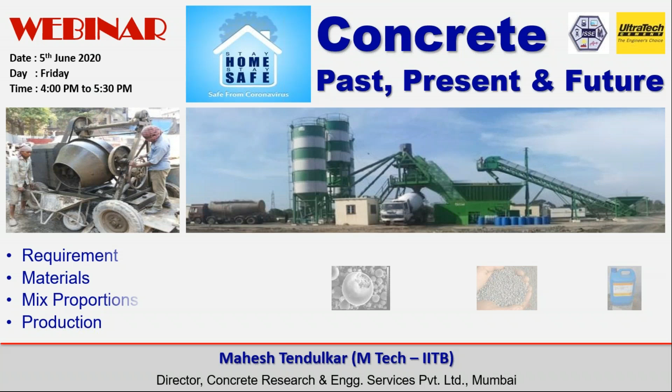There are other factors we should consider - what was the requirement in the past, what was the material we used, mix proportion, mix design, as Jain sir was telling, 1:1.5:3, 1:2:4, whatever we call it. How we were producing the concrete, what was the quality control, and most important, the workmanship, supervision, and how the concrete was performing in old days.

If you rightly see, we have improved a lot in materials - cement, aggregate. But what we are lagging behind is mainly supervision, workmanship, and quality control. So that is the most important part, and that's the reason today I'm going to cover a few points.

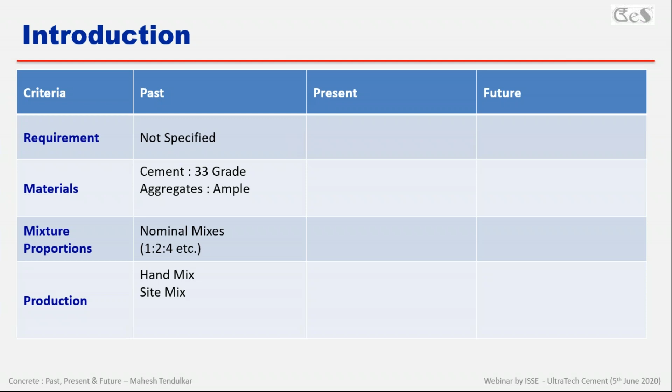The moment we changed, we started talking about grades M20, M25, M30. Even sometimes now we are easily producing M60 and M70 grade comfortably. M80 onward is still a nightmare for the site engineer to produce consistent M80 grade concrete for the structure. We'll come to this point later.

The material we are using now, 33 grade is obsolete, we now have 53 grade cement, OPC or PPC, and aggregate is becoming a big problem. There's a scarcity of aggregate, and we are now using admixtures as the demand for water cement ratio is decreasing. We are doing mix design now, talking about grades which will give specific strength at 28 days. Apart from site mix and hand mix, we have started using ready mix concrete.

Now, what is coming in the future? Slowly and steadily, especially in infrastructure projects, you can notice there is a service life requirement, a 100-year service life of the structure. So durability is now the governing factor, and concrete strength and grade is becoming slowly a secondary requirement. Durable structures are coming into the picture.

Use of supplementary cementitious material along with microfiber material is a must when we go for higher grades of concrete, say 40, 50 and above. Manufactured aggregates - nobody ever thought of producing sand, because we also faced a lot of scarcity in our metro projects in 2009, and then slowly we shifted from natural sand to 100% crushed sand.

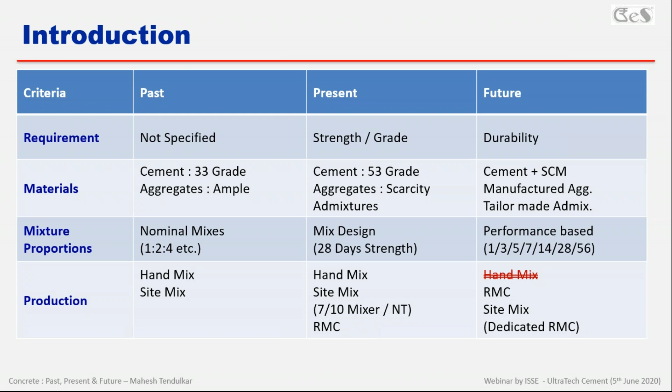Production, as Jain sir rightly pointed out, I have just scratched out that hand mix. Though it is not officially scratched, it should be, and I will explain some of the cases. Apart from site mix, now people are going for dedicated tailor-made RMC plants, very small plants which can produce 100 cubic meter or 50 cubic meter in a day, and they can produce their own concrete. So this is now coming in the future.

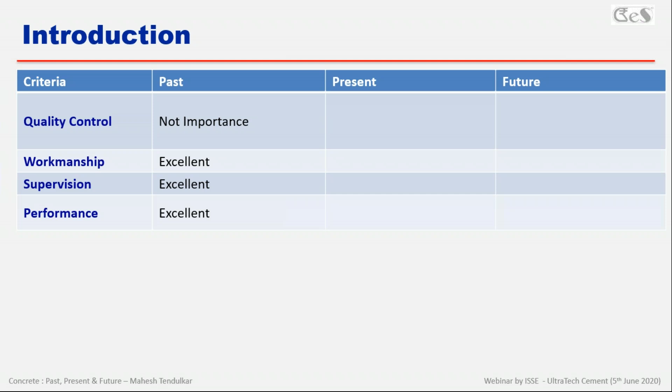Nowadays, we are talking about cube testing, and whenever there is a cube failure, there is always a post-mortem, which we call NDT. I will share my experience from our laboratory. Nowadays NDT is very common for new structures, but non-destructive testing is actually a tool for assessment of structure strength, especially for old structures. When doing bridge inspection, we have tested more than 150 bridges for NDT assessment - it is a tool for condition assessment, meaning structural audit.

Unfortunately, we are using it for fresh concrete, 28 days concrete. You won't believe it, sometimes users ask to test the NDT at 40 days. I don't know what is the purpose and meaning of that. This is a problem of workmanship and supervision - nobody is really doing the job by their heart on site, so performance concrete is not up to the mark.

And when we go into the future, already we have started in developing cities like Mumbai.

Apart from cube test, there will be durability tests specified. And not only that, some NDT of 5% or 10% of the structure will be part of the quality control measures. Another thing is the assessment of cast concrete strength by maturity index, which is a very interesting and advanced science coming into the picture, and I'm sure it will grow very rapidly within the next decade.

Nowadays, unfortunately, nobody is going into the depth of concrete mix design and the requirement of concrete. So we must understand concrete, and that's why I always call this KYC - that means a different kind of KYC. We must know our concrete in two stages: when it is in plastic stage and when concrete is in hardened stage.

Now let's see why concrete - because we know concrete is the cheapest material available for construction. You can produce concrete from locally available material and produce it with some quality control measure. That is the reason we must use this concrete, and we are using it on a large scale.

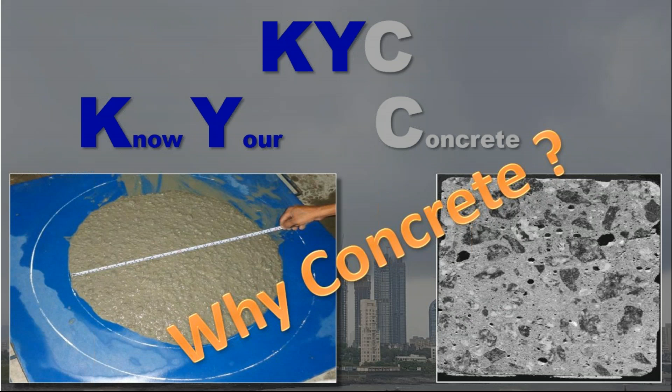In our country, this is a small analysis I have done about the estimation of concrete. Just based on cement plant installed capacity, it is around 500 million tons, and it is growing about 5 to 8% every year. Out of that, almost 64% is going into the housing sector, and infrastructure commercial is almost around 30%.

If you see, out of 500 million tons, even if you consider 75% capacity utilization of the plants, we are producing 375 million tons of cement in a year in our country. If we assume 60% is going into concrete, so 225 million tons of cement is used to produce concrete, with a nominal cement content of say 8 bags per cubic meter. We are producing almost 1.5 million cubic meters of concrete per day, which is around 675 crores per day.

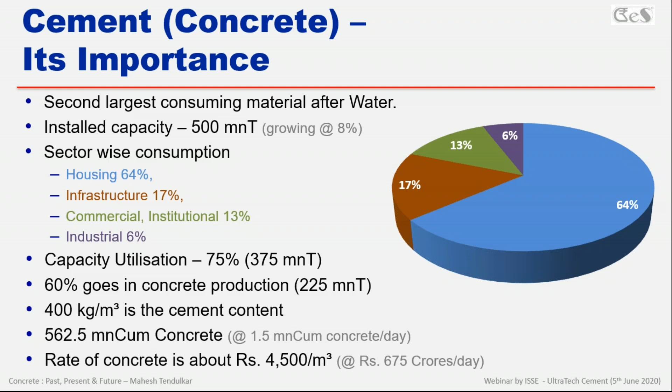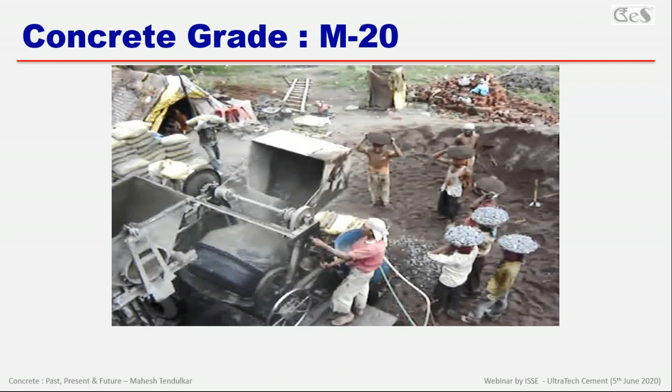So we are handling such a big economy of our country, and what we are doing at site - as Jain sir has rightly said - I'm not saying all sites, but the majority of sites, this is the condition. We are producing concrete by old tradition: gangwalas, gamelas - they don't know anything about water cement ratio or proportioning of mix, and they are casting the slab.

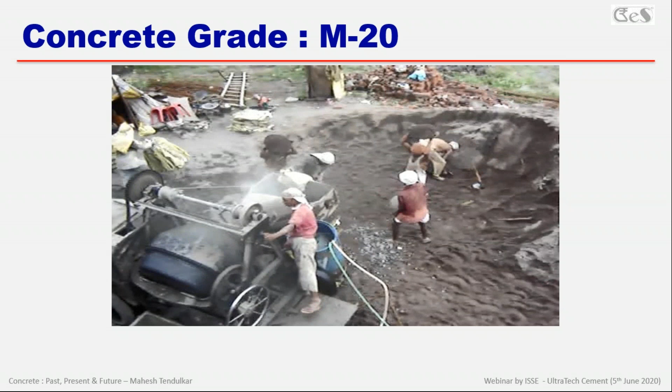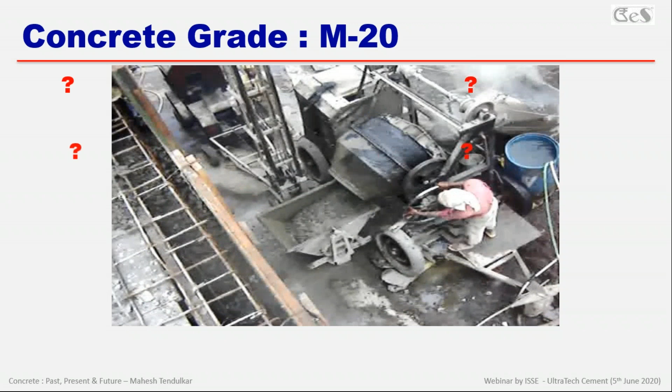This is my own experience in 2004, in one of the district areas of Maharashtra. I was standing on one of the slabs, and this is the concrete which was produced. So as a curiosity, I thought let us take a cube of the concrete which was produced by this mixer operator, and let us assess what is the strength of this.

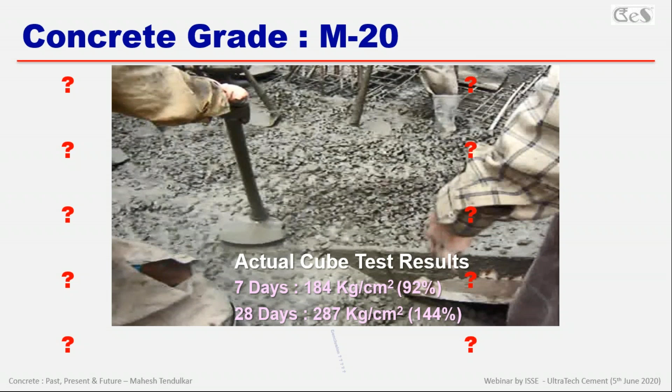What we observed - the actual cube test results of M25, M20 grade concrete was almost 280, meaning almost 130, 140% above the characteristic strength. So we get confused. What is the conclusion from this? Whether mix design is really important, or jo chal raha hai wo chalne do - whether we are fools who are insisting on mix design, or what they are doing is correct.

But that is the reason I was telling in the beginning - now the focus is changing, and strength is going to become secondary. Even though we achieve the strength, durability is going to be hampered in such structures because of non-control of water cement ratio. And this is most important.

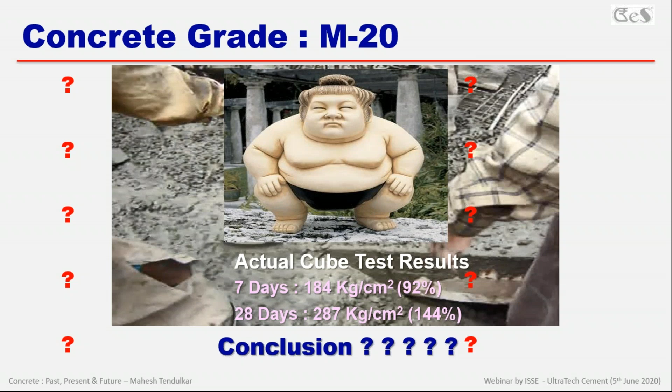You will find that all our cement companies in India have changed from wet process to dry process. They have very good quality control, and they are producing very good quality cement. But unfortunately, we are not using that cement rightly at the site - we add extra water, and we lose the benefit of good quality cement produced by our good scientists in our country.

So, I'm talking about the evolution of batching and mixing of concrete in our country. Earlier, 7x10 mixers. Then I remember around '96 or so, weigh batching was made compulsory by some government projects. So in between, weigh batchers were introduced, but it was really an eyewash.

Then we started the CP30 batching plant, compartment batching plant, and now we have the batching plant which can produce 3 cubic meters of concrete within 1 minute. So we are having such a high production capacity.

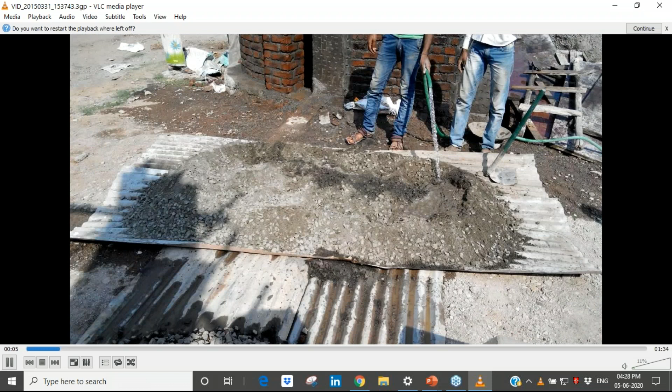We talk a lot of things in seminars, but whether that goes and gets implemented at site. So this is a typical situation.

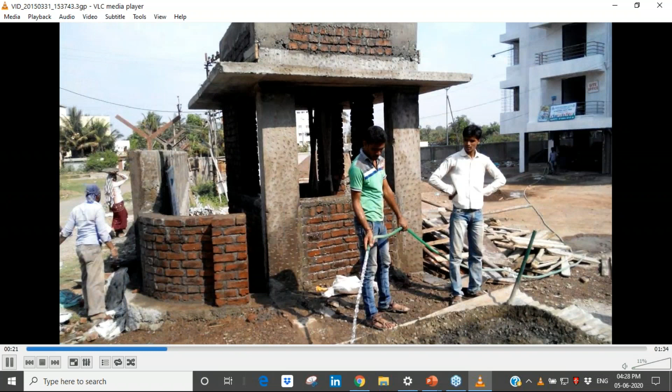We asked him to cast the column again in front of us, and this is the column which he was complaining about. He cast this maybe 12 hours prior, and after removing the shutter, he says this edge is breaking. Now I am sure if the condition of production is like this, it's actually much better concrete, because if they are producing concrete by such a method, the column is at least standing.

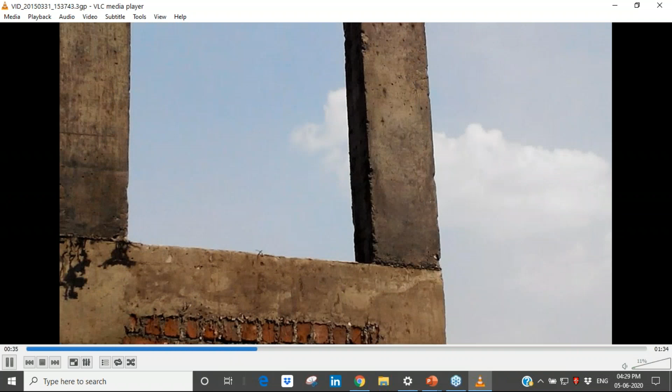They are not measuring the water cement ratio, and this is a situation happening in our country. This is a whole structure, G+7 building, standing on columns which are cast by such kinds of things. So this is a typical scenario of the overall condition in our country.

So we say yes, concrete, we have RMC, so we have solved the problem. Yes, RMC can solve the problem provided we implement the whole system of RMC. Truck mixer will come, it will pump the concrete, compact it properly, shuttering is good, our structure is good. But my observation is, what about the casting of columns?

Nowadays, in many cities, even in cities like Mumbai, the transit mixer will come to site and they will not use a pump for transporting concrete. They will use some Indian jugaad, and then they face a lot of problems. This is a real case study in one of the buildings in Mumbai.

There was a transfer girder cast at this location, maybe on the 7th floor, and there was a fear with the consultant that there is something wrong. So he wanted to take the core of that column. And after taking the core, it was surprising, the concrete had not achieved even about 60% of strength even after 3 months.

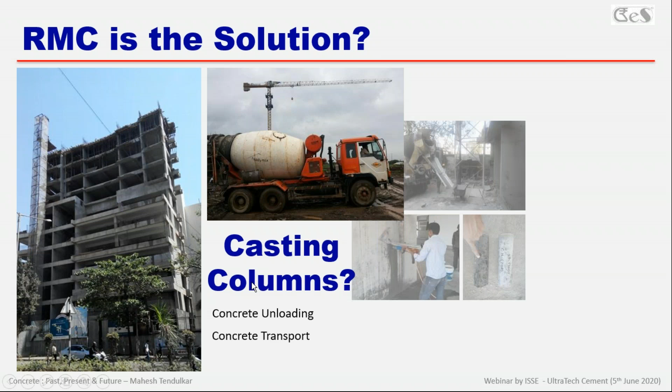So the transit mixer was waiting at site almost 3 hours. And what happened then, we have taken the core, and you can see congestion was so high and heavy that whenever concrete was poured from the side, the aggregate was not flowing to the surface. You can see the surface, there is absolutely no aggregate or very little aggregate in the core surface area, the cover zone.

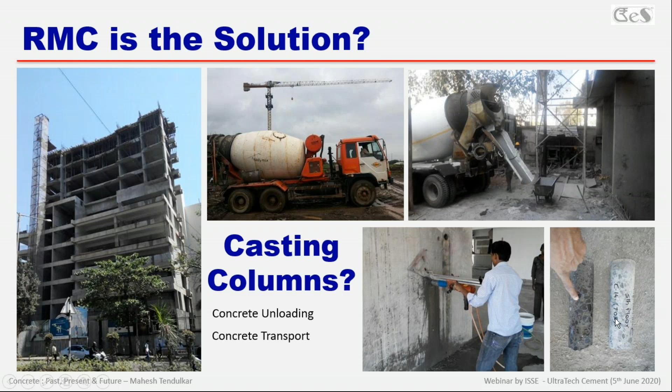Even when we cut this cover zone and tested this core, still we found it was not even matching 90% of the strength required. You can see some clips, I hope you must be viewing this clip.

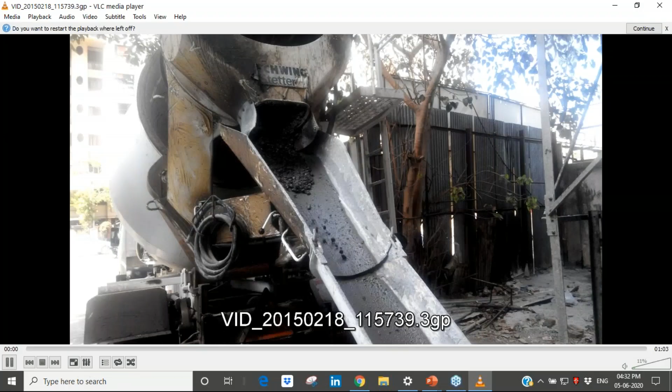This is typical, when we go for high grade concrete, a lot of precaution is needed for the admixture and crushed sand. You can see the concrete itself is segregating even while unloading from the transit mixer.

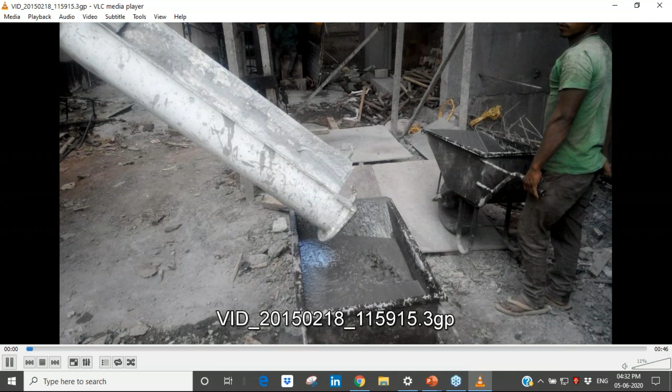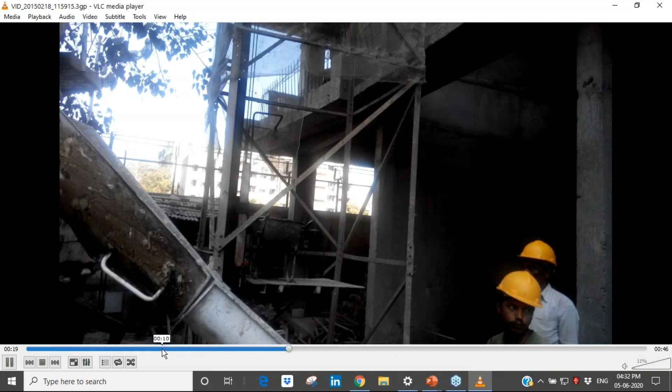Then this concrete will be taken to the further level by this winch. We perform this, we say this is a high-rise structure, a good structure, but actually this is a crude method, because a pump is not arranged, as pumping concrete requires some minimum cubic meters or there are extra charges, so we don't afford to pay that additional price for pumping, and this crude method is used for casting the columns.

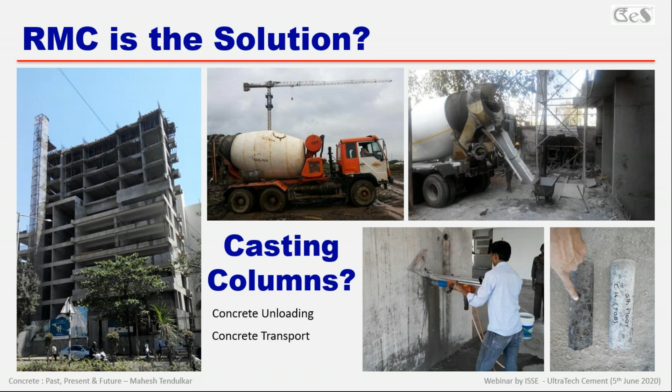Who is selecting the cement? It is supposed to be the engineer's choice. But when we go to the common man, they believe in advertising, they believe in branding. The builder will believe in it, the owner will take the decision, in a project the purchase officer will take the decision. And everywhere, the poor civil engineer has no option but to use the cement which is selected by the purchase department, the owner, or the common man.

There are very misleading slogans on cement bags. I was told that now it will be banned in our country, as they are having some rules. So this is how the selection of cement happens.

What are the selection criteria? Our selection criteria is the cost per bag. Now the cement prices are going and reaching 350, 360 rupees per bag. So even if we get 5 or 10 rupees cheaper, we shift the brand, we shift the type of cement very frequently. So we judge the cost per bag, not per cubic meter.

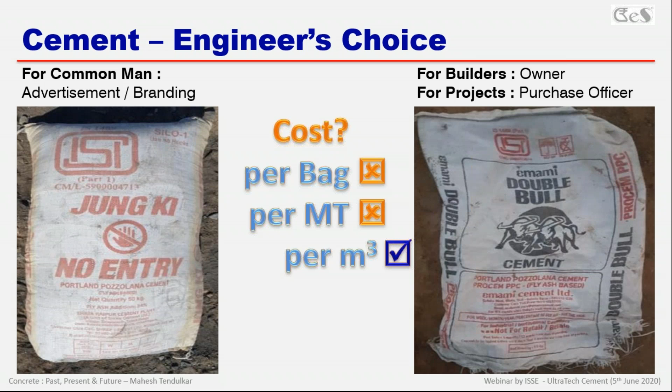We have implemented this at some sites in Mumbai where we were working as a consultant - working out the concrete mix design with a particular cement to see the benefit, whether that cost reduction of 5 rupees is really worth it or not. Otherwise, we have to put extra cement, extra dose of admixture, and ultimately our concrete mix is not economical. So whenever we are comparing cement prices per bag or ton, always compare with the per cubic meter cost of concrete by doing trial mixes.

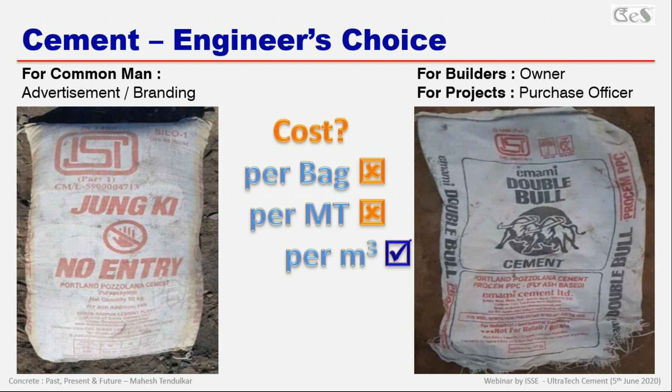Another part I want to highlight: when I was visiting one site in Aurangabad, Maharashtra, SRPC was insisted upon because it was a sewage treatment plant, but there were very high chlorides present. So it was really an injudicious choice. Whenever sulfate and chlorides are both critical, SRC is not the right option. SRC can be used only if chlorides are not present or are minimal.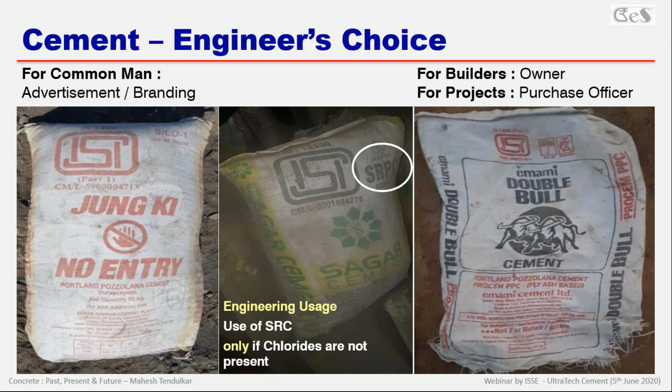So this is the technical part as far as cement is concerned. Apart from cement, as I said, the present cement is not OPC cement. We are now blending OPC with fly ash, blending GGBS, adding microsilica, adding ultrafine GGBS, Alcofine brand. So we are going to higher and higher grade by packing density, improving the packing density, initiating secondary hydration. But today I'm not going to touch that part in greater detail.

Whenever you are going for high grade, we have to use blended cement or supplementary cementitious material at site. But be cautious - if we are using fly ash or GGBS at site, we should have a proper batching and mixing plan. Otherwise we can't just use a 7/10 mixer and add GGBS in it. No, it is just impossible. Then we are really playing with the life of the structure.

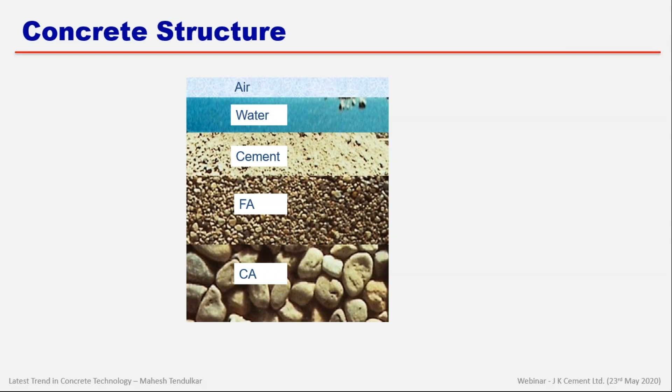Then we come to the next part, which is the concrete structure. If we talk about concrete, we are always cautious about selection of cement because cement is the costliest material. But if you see the concrete structure, the majority part, around 65 to 70%, is aggregate. But cost-wise, that is the minimal part. So we don't look at the aggregate part carefully.

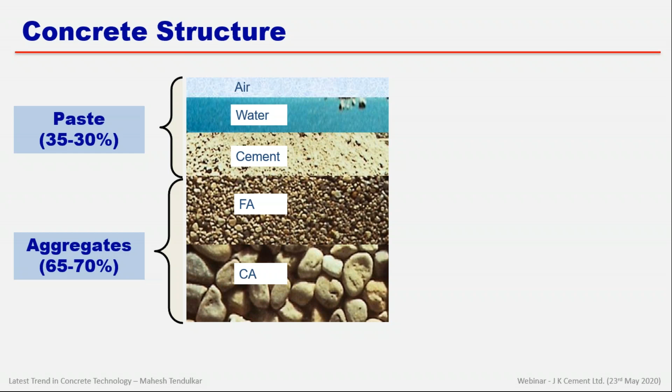But when we go higher grade, aggregate becomes more critical and the paste will be very strong. Concrete will not fail in bond, but aggregate will fail. So whenever we go for 50 and above concrete, we should be very cautious about various types of coarse aggregate and fine aggregate. Nowadays we have no option but to use coarse aggregate - 10mm, 20mm single size aggregate, VSI. I will touch on that point in detail later.

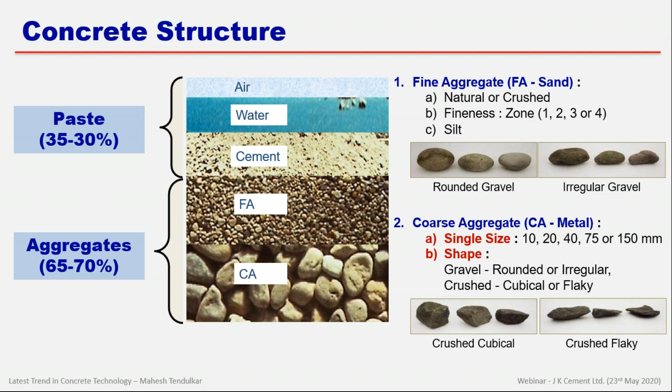Then crushed sand also - we have fine aggregate also. Now it is manufactured crushed sand. So we have good plants available, even at district level I've seen good manufacturing plants of aggregate.

And this is part of our planning, I will say. This was one of the infrastructure projects we were visiting - a road project where at least 5 to 6 lakh cubic meters of concrete is going to be produced. During our first visit, we observed that at site there was a fleet of transit mixers and a fleet of placer booms ready, but the crusher was not ready.

For such a huge concrete quantity, we must have an in-house crusher. According to me, for any road project, the crusher is the heart of that particular project. If the crusher is delayed, the whole project will get delayed. If the crusher is not properly designed, our concrete will have a lot of problems during execution.

This is aggregate right from the crusher. As a civil engineer, we should get involved in planning and designing of the crusher also, because that will have an effect. As we discussed about the gang-wala concrete for bungalow slabs, if you go to any district level, they use only 20 mm aggregate and sand. Surprisingly, some engineers will also tell you that 20 mm aggregate will give the strength. This is one of the biggest myths, that 20 mm aggregate gives the strength.

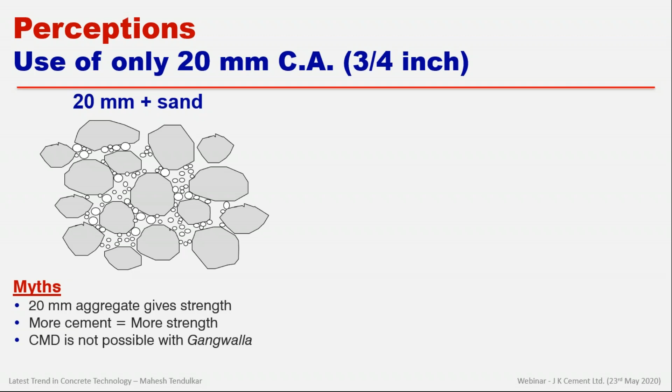I have seen a lot of mix designs where they design for 80 mm, 100 mm slump, and then hand it over to the gang-wala, and then there is a whole problem - strength and durability will create issues. Here, the most important point is we must use 10 mm coarse aggregate. This will ensure optimum packing, reduce segregation, improve cohesiveness, and give better concrete.

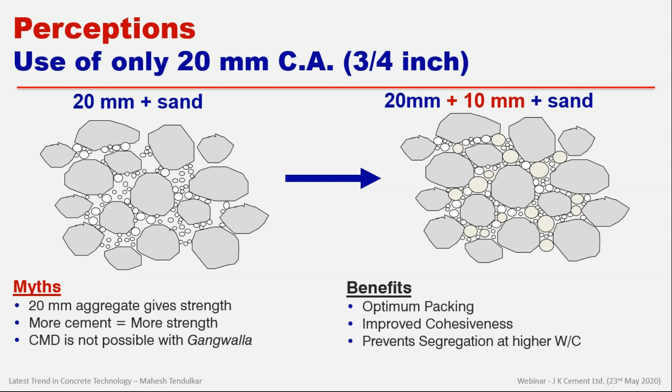If you go to any crusher, there will be ample 10 mm aggregates available. It is not that the crusher produces only 20 mm and sand - no, 10 mm is also available. Sometimes they crush this 10 mm to produce manufactured sand. So that is the result. My sincere request to all site engineers is to visit the crusher at least once, and then decide which aggregate we have to use in concrete.

So this is the most important tip - you must visit the crusher, and see what we should observe there. On the right hand corner, this is a typical old-age crusher which I have seen till the 90s or maybe 2000. Even now there might be a few such crushers available, but I don't think such kind of crushers are common now.

They were having rotary screens - it was a jaw crusher which was crushing the aggregate, and this rotary screen was screening the aggregate. So there was always a problem that 10 mm was mixed with grit, and 20 mm was oversized. This was a typical problem when using aggregates from this type of crusher.

I still remember, as per code we have 10 mm, 20 mm, 40 mm aggregate sizes. But when Mr. Remedios was teaching in his book, he was classifying 15 and 30 mm also, because at that time we were not getting single size aggregate, before this VSI aggregate technology.

So what should we see at the crusher? First stage crusher is the jaw crusher, second stage crusher is the cone, and third stage crusher is the VSI crusher - actually vertical shaft impactor, which is a shaping tool. It gives good shape, reduces the flakiness and elongation index of aggregate, and we get single size aggregate.

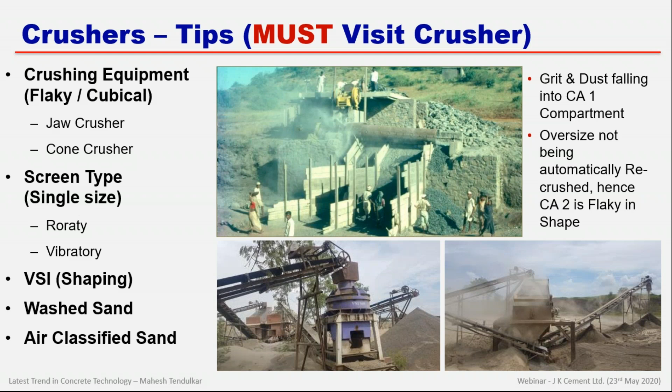This is removed by washing the sand using different mechanics. Not only that, recently air classified sand has also become available, and these are not even imported sand; these are our indigenous sand plants. What they are doing is, after the VSI process, they are extracting the fines from the crushed sand. This is a very good technique.

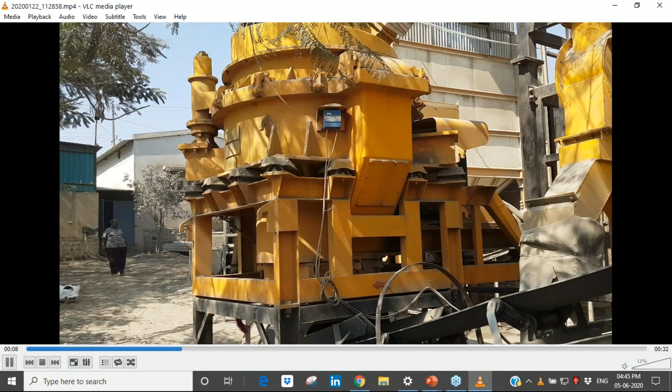I can just show you one system. This is a typical system of an air classified crusher. The problem with washing is sludge, which is a big problem. In a typical air classified system, it sucks the fines. I think there is some problem with the video streaming, but I'll show you in the next video.

Whenever this crushed sand is on the bed, the system takes the finer particles from it. These are the fine particles which are unwanted for our sand. So the 75 micron fines get reduced and we get a good quality of crushed sand. When we use this quality of crushed sand, we can comfortably produce M80, M100 grade concrete with a proper mix design.

Here you can see this is a normal crushed sand, VSI crushed sand, and this so-called crushed sand is actually grit. It is crusher dust. It is not processed. It is simply a waste product from any crusher, especially a rotary crusher.

These are a small comparison of how this affects quality. I compared manufactured sand from VSI versus normal stone dust. The main difference is in 75 micron passing. Here it can be controlled to a 5 to 15 or 18-20% range. Here there is no control and no consistency, and water demand will vary during concrete production, making it very difficult to control concrete with such crushed sand.

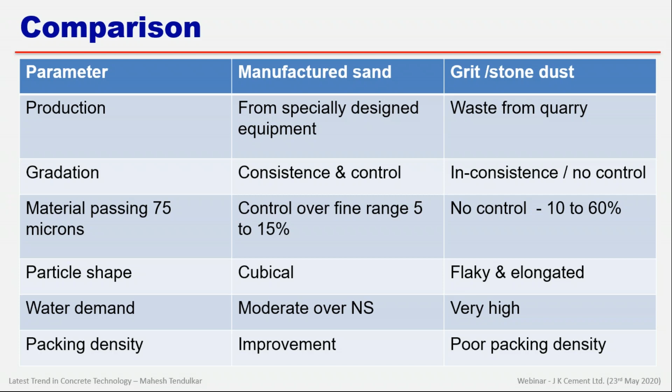So this is the main reason we should ensure that whenever producing concrete with manufactured sand, it must be VSI manufactured sand. If it is air classified, it is well and good.

Now, the next point I want to highlight is the laboratory. In this laboratory, we really don't want to spend a single rupee. You can see we are developing structures like G+22 buildings, M30 concrete. But what is the testing material laboratory at site? Where is the testing lab? So this is the testing lab - a very pathetic situation of such labs.

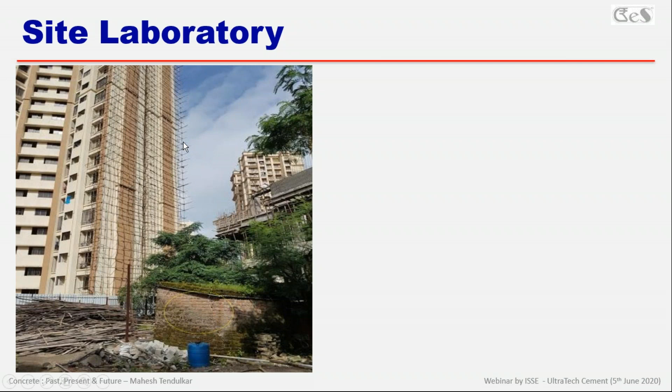This is the most important heart of our quality control, and there we want to minimize the cost. If the normal range of a CTM machine is about 1.6 lakh to 3.5 lakh rupees, we ask, is there something cheaper available? Then somebody will say, okay, 60,000, 80,000, okay very good, 50,000 - then go to manual mode. Just imagine, we are producing crores of rupees worth of concrete, and we are saving a few lakhs on the machine that tests the whole quality control of our concrete.

This was a particular topic of my MTech thesis. I compared it with the metro project analysis of Mumbai Metro, and with the latest projects going on, which have specified very good methods of quality control under QAP.

The whole lab equipment was costing 23 lakh rupees, and for that particular project, about 4 lakh cubic meters of concrete was going to be consumed. The cost of lab equipment was 6 rupees per cubic meter, and the average concrete rate of all grades was around 6,350. So lab equipment cost works out to 0.01% of concrete cost. So there is no logic to spend so much time negotiating to select the cheapest material for a laboratory.

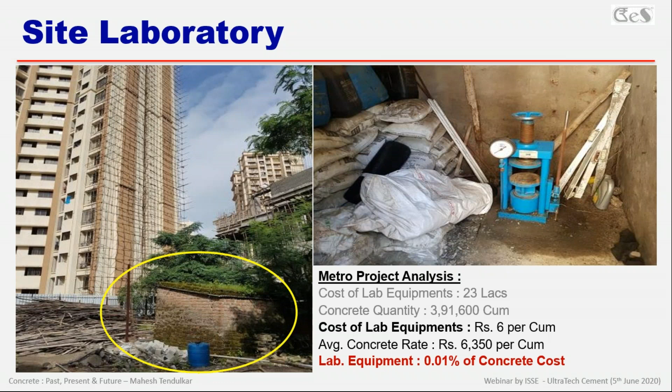One should have a bare minimum laboratory at site. For a normal building, I'm talking about the district level or extended suburbs like Kalyan, Dombivli, where we don't get RMC but we are getting crushed sand - the CTM machine, which is the costliest material, let's remove that. We can test in a third party lab, or some cement companies are giving cube testing service which we can utilize. But at least we should have bare minimum testing equipment at site.

So at least we should have sieve analysis. Even if we don't have a full set of sieves, at least 20mm, 4.75mm, 600 micron, and 150 micron sieves are required, along with a weigh balance.

So we can find the problem with our crushed sand or even the aggregate size. For specific gravity, we require very nominal equipment called pycnometer, very negligible cost. For moisture absorption, even if not oven, a hot plate is sufficient.

But do something and get the figures at site by testing, and make a habit of testing aggregate at least once in a week. So one should have a normal technician at site and one quality control engineer at site, and they should do some aggregate testing once a week. After testing regularly, we can just by our judgment accept 10mm and 20mm aggregate based on visual inspection.

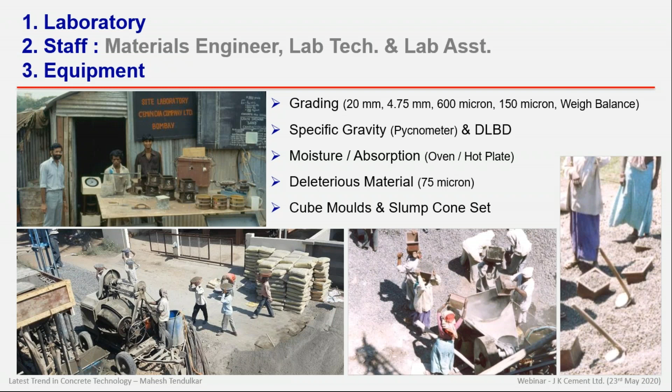Now, chemical admixtures - I don't want to go into much detail on chemical admixtures, but when we go for higher grade concrete, we are creating a lot of problems, because admixture use is becoming very critical, especially with crushed sand. So before going to that, what is the main effect of admixture?

There are two main effects. We want to increase the initial workability - that's what a plasticizer or super plasticizer does - and we want to delay the setting time. So there are two common effects which we use. Initial slump is increased so we can transport the concrete, place the concrete, and compact the concrete. And if it's a big pour, we don't want a cold joint, so we want to delay the setting time - that is called retardation.

But nowadays, admixture companies have done very good studies and come up with admixtures having both effects - they call it a retarding super plasticizer. Depending on the requirement, they have the retarder dosage built into one pack system. Ideally we can add two separate systems, but now we can have one pack system which has retarding super plasticizer.

If we are at the RMC plant, I have seen many reputed plants use a two-pack system, where they use retarder separately and admixture plasticizer separately. This can be used, but for normal site mix concrete, it's better to go only with the retarding super plasticizer. Then we must know what is the base of admixture available.

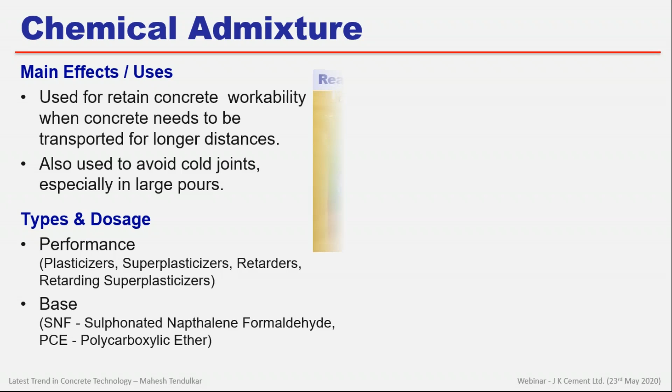There are two kinds of base mainly in our country. One is SNF base, which is sulfonated naphthalene formaldehyde, and one is PCE base, that is polycarboxylic ether. The first one is generally used for lower grade concrete, commonly used with natural sand. So natural sand, M40, M50 grade concrete was possible with SNF, but nowadays we have this latest PC admixture. There are parameters: low PC, mid PC, high PC. I don't know how they classify it, but performance-wise we have to judge it for the admixture dose. Now I am talking about some district area.

Always add admixture in liquid form, especially in the 7/10 mixer. Don't go for any powder-based admixture, because I have seen this pouch I collected from one of the sites. Slab concreting was going on. That pouch was costing 50 rupees and having 50 grams of powder. And then I collected some, and after washing, I studied that material, and there were some instructions.

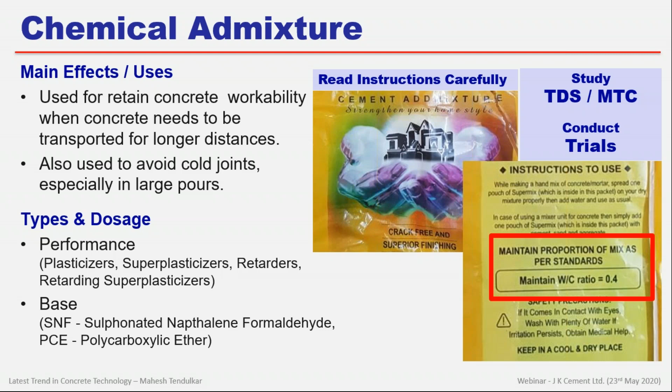So ideally, if you are doing any admixture, there is no harm, but first study the technical data sheet, TDS, and manufacturer test certificate. Conduct a control trial with the admixture trial, and find what difference you are getting. What is the effect, how slump is increasing, how setting is delayed, what benefits you are getting, is water reduction there, and then only use this chemical admixture.

So this is very common. This chemical admixture is not magic. It only gives a negative charge on the cement particles, so they repel each other, and this entrapped water is freed, so slump is increased.

I am going to share this presentation slide at the end. I will ask the organizer to share these slides, because arbitrarily I have given one example of how it works. Mix 400 cement, 200 water, simply, so we can understand 0.5 water cement ratio. So if there is no admixture, we get X slump and Y strength. This is a control mix.

The moment we add, say, 1% dose of admixture, because of the admixture this water is free. So what will happen? Slump will increase. So there is an increase in workability. But our target is not to increase the workability. We are happy with the same workability.

So what we can do is reduce water and add the admixture. We have added 170 liters water and 1% admixture. When we reduce the water, what has happened to water cement ratio? It is reduced. So slump is again back to normal, but strength is increased. So there is an increase in strength.

But why admixture is becoming very popular is the third point. What we can do, even if we don't want to increase the strength, is reduce the water, reduce the cement, and maintain the water cement ratio the same. So we get a reduction in cement content. That is the reason I will say for M20, M25 and above mixes, we must use the admixture, then only we can produce good cohesive concrete at any site. So this is a simple dispersion mechanism of admixture.

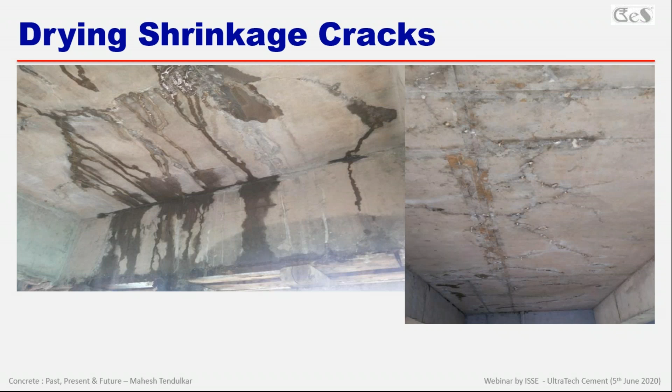So the best way of protecting concrete is by use of plastic sheet. This is a view from one of our road project sites. The contractor was very much reluctant in the beginning to put plastic sheet, but this is not an extra cost because we have to put some plastic sheet between DLC and PQC anyway. The same plastic sheet has been applied on top. So what is the benefit of this?

Imagine there is a concrete surface, we put plastic sheet, and water from concrete starts hydration. This is an exothermic reaction, so water will be heated and will try to come out from the concrete surface. But because of the plastic sheet, it will condense. All these water vapors will be condensed, and you can see droplets within a few hours or even half an hour beneath the plastic sheet.

So we are improving the humidity level beyond 90% between the concrete surface and the plastic sheet. But the precaution is the plastic sheet should be absolutely watertight, so it should be strictly placed on the concrete surface, not above it. Otherwise it will be a disaster and there will be a wind tunnel effect, causing more evaporation of water.

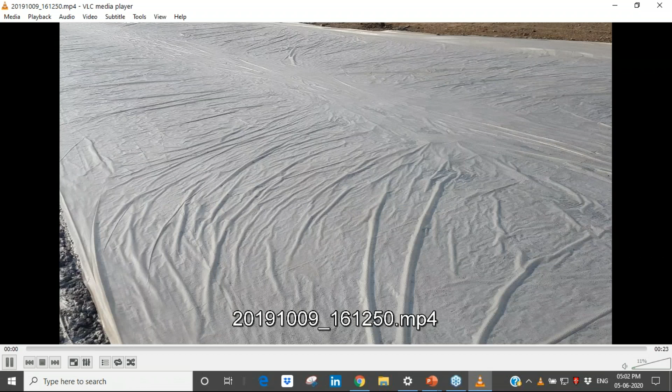Sometimes there is confusion. Now we are doing a lot of temperature-controlled concrete, so thermocol is also used. Since we have some time, I will explain the difference between thermocol and plastic sheet. The plastic sheet will condense the water, improve humidity, and avoid evaporation loss. But thermocol will do an additional thing - it will act as an insulator.

Suppose the core temperature of concrete increases to 70-80 degrees, and the surface temperature tries to match the ambient temperature of 40-45 degrees. Then there is a temperature gradient, which could cause thermal stresses and the concrete will crack internally. This happens mainly in mass concrete, and if you see, all our infrastructure projects are nothing but mass concrete. So that temperature has to be controlled.

Even in our metro project, our placing temperature was restricted. Proudly I can say it was the first time in a metro project of our country that 30 degrees was the placing temperature for all structures, including pile up to girder. So 30 degrees was specified, and we have done a lot of trials for that.

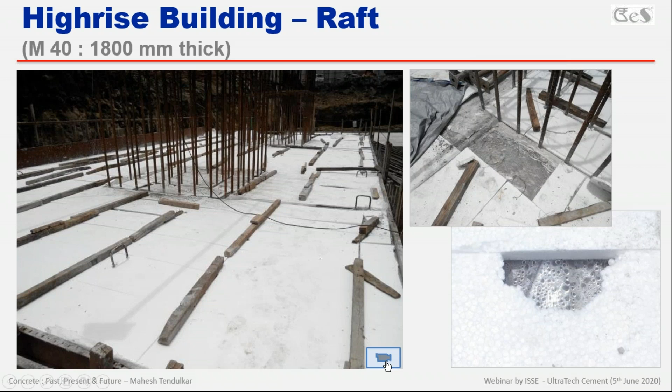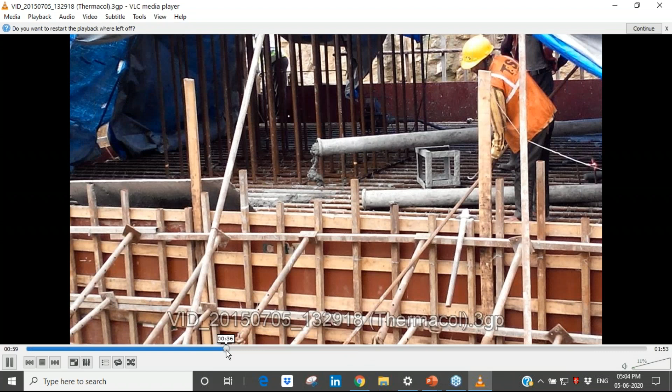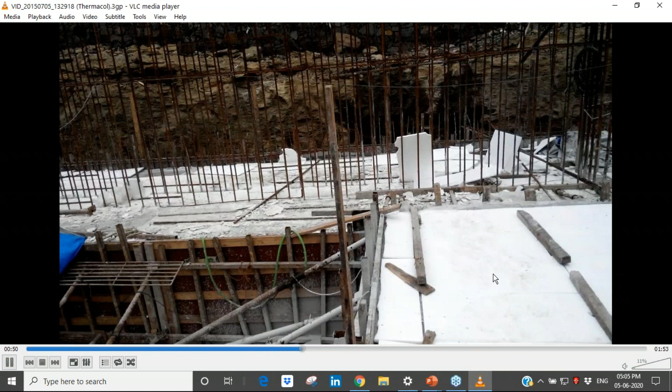If insulation is required... you can see here, this is the third pour of the raft of one of our high-rise buildings under process, and you can see the first pour here. For this, absolutely no curing was done for 7 days - only plastic sheet and thermocol insulation by thermocol vertical shutters were intact, which you can also notice. In the second pour, where I was standing and taking this clip, you can see thermocol doing the job of insulation, controlling the gradient within 20 to 25 degrees as specified by the consultant.

And now you can see the turns - see here, you can see droplets. You can clearly see droplets of water below the plastic sheet, which is the best curing method to avoid cracks, along with insulation to control the thermal gradient. I found this a very interesting system.

One of our project managers, in charge of a road company in North India, developed through Jain Irrigation a good sprinkler system for a 45 kilometer stretch of road. They identified bore wells at every 3 to 4 kilometers and prepared this sprinkler system.

They get connection from the local bore or well, and the whole curing system is controlled by only 2 people - one operating the pump of the bore, and one lady operating the on and off nozzle of this system. You can see here, this red one is a nozzle.

She used to open 10 nozzles at a time, starting from one end. If the nozzles are spaced every 15 meters, so 150 meters, she will operate for about half an hour, then go to the next 10, and so on. The whole sprinkler system is not only effective but I am sure cost effective too.

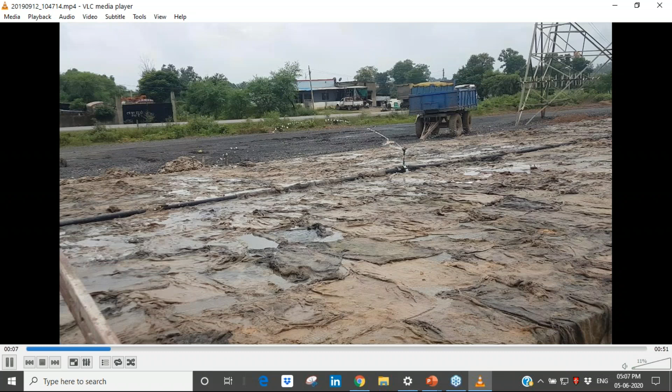This is a clip, let's see how it runs - a slightly bigger clip. You can see the sprinklers operating here. There is a lady opening the nozzles and managing the pump. So it's effective, cost effective, as well as technically effective system for road concrete curing.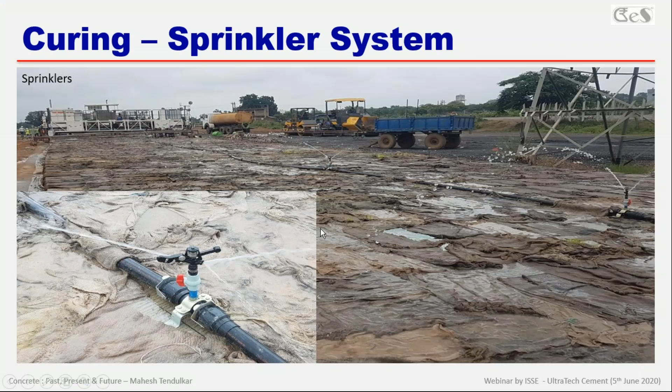Now I am coming to the last part of my presentation. We have 5 to 7 minutes about cube testing. Many times we judge by cube test results and we are happy - we wanted M30 and got M35, wanted M60 and got M68 or M70. But according to me, cube testing is just one parameter which indicates whether the whole process you followed for producing concrete is correct or not.

Sometimes it happens in reverse too - the cube will fail and we'll say the structure is not good. I'm not saying that cube failure means the concrete has also failed. No, go and observe the structure first. Cube testing failure is always like a postmortem.

First and most important thing - don't throw away that cube. Keep it as a sample, like a histology sample, the way we preserve a cancer sample. Keep that sample for further analysis, go to site, test the surface, and then come to the conclusion - is it really a concrete failure or is it some problem with the cube casting and other areas?

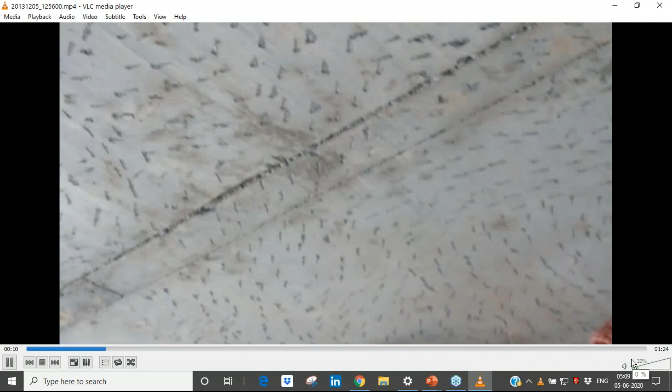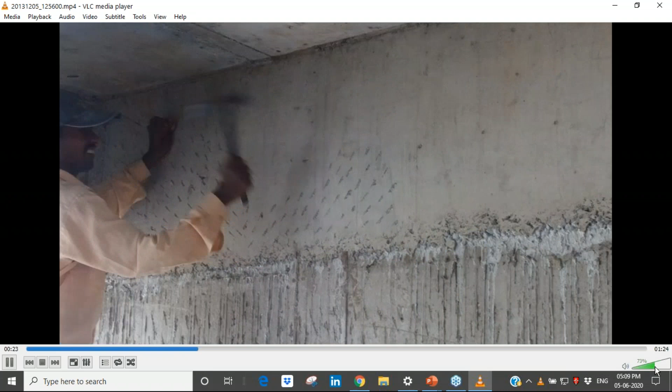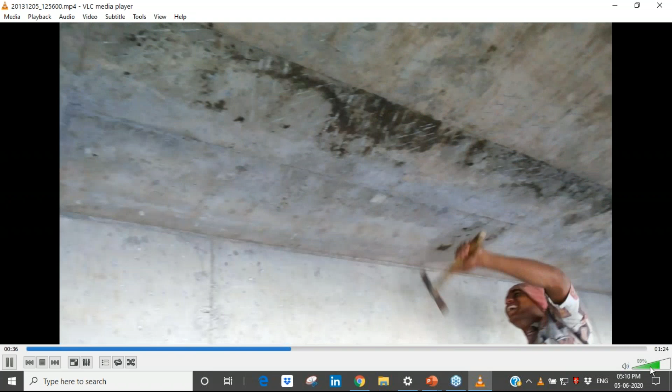So this is one of the tests. Suppose we get a very good ringing sound, then we have to check what went wrong with cube casting and cube testing. Another case I am proudly showing - this is a site where M40 grade slab was under process, a normal site.

The next day, when the carpenter is fixing the starter formwork, notice he is using a drill machine to put in the nail. Now tell me, on the second day of slab casting, if he has to use a drill machine to put a nail, then your cube strength results are absolutely wrong. What went wrong?

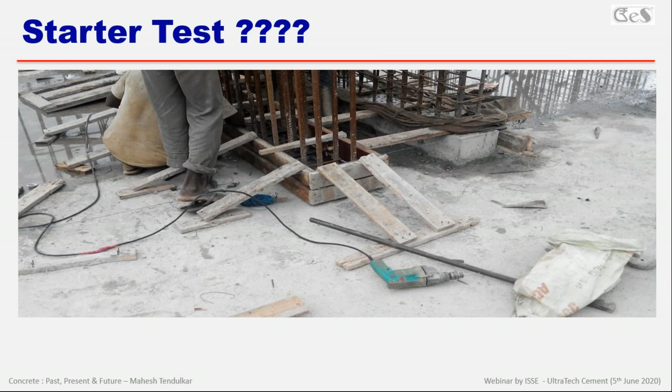That's why I say it's a post-mortem of the cube test. This is a problem we should address. Cube casting at site is very, very important - first of all, nobody measures the slump while casting the cube.

This is very important. We have a quality manual in Tata where our first requirement is that whenever a cube is cast, we have to note the slump of that particular mix, which will indicate if there is excessive slump. But our country, our engineers, and everyone involved are so smart...

We have special mixes for cube casting. So we control the mix, control the water, cast the cube, and then go with anything we want at site. Or whenever I showed you this casting of column by RMC, whenever the concrete mixer or transit mixer comes, immediately from the first few loads we take the cube and we are relaxed.

It is the failure of the RMC supplier, or it is your failure—you have not cast the cube properly, or you have not cured the cube. Don't play any game, because ultimately we are professionals. We must go to the cause and find the root cause of that failure. So this is one thing.

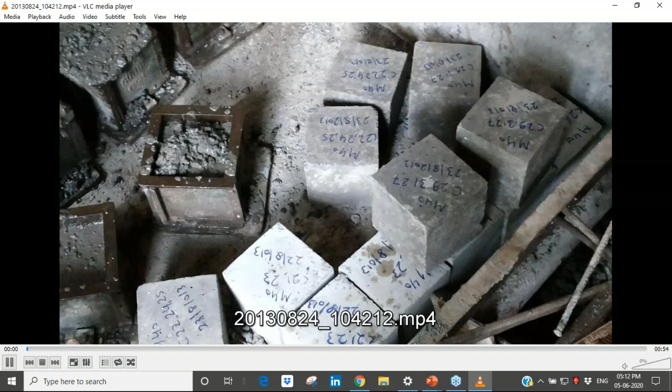Then, how we are casting the cubes—this is very common. Many times we don't have tamping rods at site for casting the cube, because we need a 16mm or 20mm rod. So we end up using a long 1.5 meter or 1 meter rod to cast the cube.

And always, only after a failure do we analyze all these things. We don't make the system initially, but we want to analyze only after the failure happens.

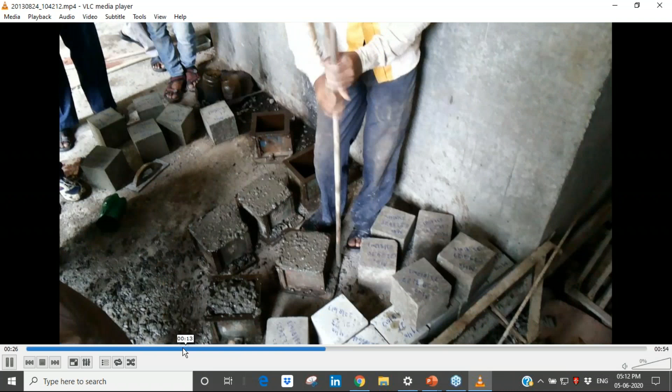Here, if you notice, I want to highlight one thing—let me pause the video. You can see one cube, the date is 22nd 8/13, and this one is 23rd 8/13. That means these cubes are lying here for almost 2 days. This is yesterday's cube, this is day before yesterday's cube, and we are casting this cube now. When these cubes give less strength, we will scratch our heads wondering what went wrong.

So we want to find the reason—follow the code perfectly. Many times I will come back to that curing water temperature. Why is it required? Yes, it is given by the code, and we have to follow it. We want to do some additional study by casting the cube at site and curing at site conditions—we are free to do that—but we should follow the code for the acceptance criteria of cube testing.

Then cube casting—always cast the cube in sets of 3. Don't let somebody ask to cast 6 cubes, 1 cube from each transit mixer. No, then you will get lost in interpreting the results. Cast at least 3 cubes, and you can take 1 for 3-day, 1 for 7-day, 1 for 28-day testing, so you can do some analysis of the cube test results.

Here I am showing the best example which I pointed out at a roadside site. See, he has taken all samples, because at a roadside we cast the cube at least 100 meters apart, since by the time we cast the cube, the paver goes about 50 to 100 meters away. So they transport the sample in a trolley and then cast the cube there.

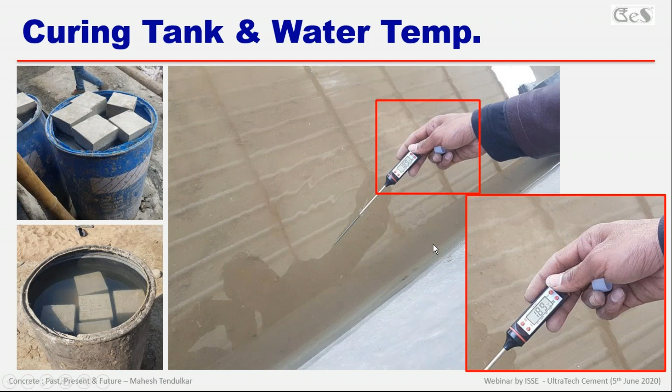I don't know if it should be made mandatory, but people have to use it if they want a good quality job. Lastly, the loading rate. Code specifies a loading rate of 140 kg per square centimeter per minute. Always take a stopwatch, measure, and reverse calculate the rate. I'm sure this rate often goes up to 500-600 as well. Whenever we want to finish more cubes at 28 days, we increase the setting - this is very wrong and gives us a wrong interpretation of results. We have to follow this pace judiciously, otherwise we get such odd failures of cubes.

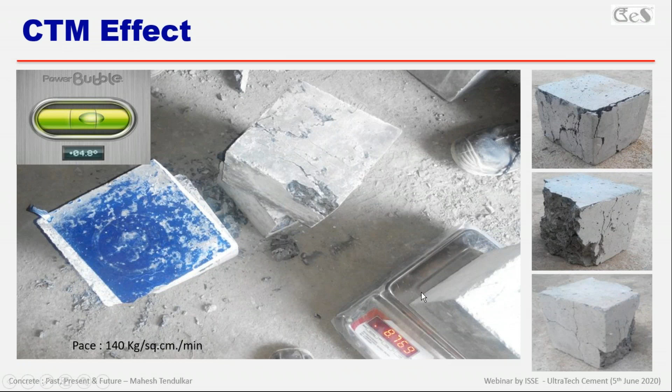Very surprisingly, we see a perpendicular crack. We always expect failure in the direction of loading, but we get a perpendicular crack at the rate of loading - a shear failure.

Before coming to the testing machine pattern, I want to show you from the same site - I've taken two cube molds. Code has given guidelines for the thickness of plate and weight of the cube mold. This cube is a proper ISI brand, weighing 13.6 kg. This other one is 7.8 kg. So obviously there will be a difference of about 1,000 rupees per set. Always go with the standard mold because that will give you proper testing results.

Lastly, if platens are not perfect, our cube will get uneven loading. Here you can see this carbon paper - we can insert it and find the depression on the cube. Here there's absolutely no loading, and there excessive loading. So the cube will fail more where there is loading. If there's a problem with the platen of the cube mold or CTM machine, we will get incorrect results.

This is how I want to show the last clip. You can see this video - wherever there is a white patch, you don't see any crack, but where there is uneven loading, of course... this is not only the platen, maybe the cube error too, because the cube may not be the same size, and then we get improper results. Ideally, we should test the dimensions of the cube using a vernier caliper.

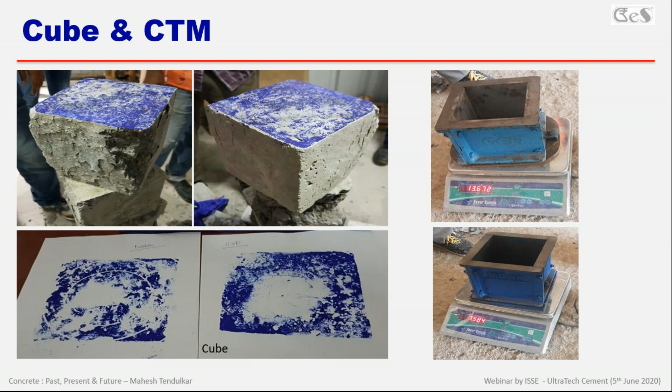Very rarely have I seen a vernier caliper at a construction laboratory or construction site level. Of course, NABL laboratories use it, but why not at site level too? It can be used even at the site level - that is the reason to eliminate all these factors.

I'm not going to go into detail on this because this subject itself is a big technology coming up in a big way. Maybe in the next 10 years, cube casting and testing will be obsolete, and we'll have to put in some sensor, calibrate that sensor, and get the in-situ cast strength of concrete as on - at that time - on our app, laptop, or mobile. This will come in the future. We are also working on this for a particular site. This will be the future - the maturity method for estimation of cast strength.